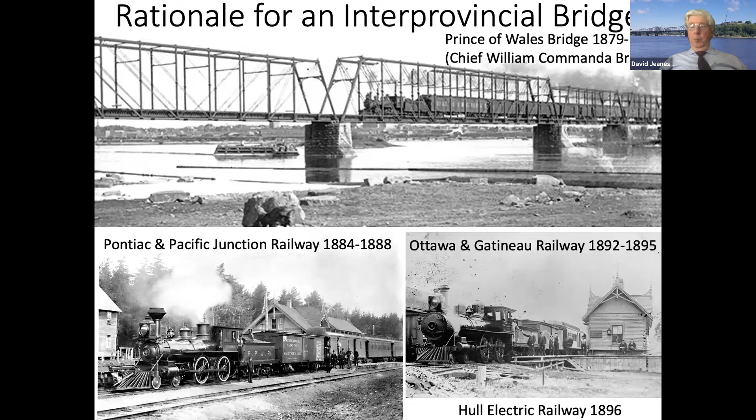He'd worked on the Welland Canal. He'd built railways all over Quebec. He was actually president of both the Pontiac and the Gatineau Railway. He'd built the city gates, the old city gates for Quebec City, and the waterworks and aqueducts for Montreal and Quebec. And finally, in 1880, he'd built the stone piers for the Prince of Wales Bridge. He also knew how to raise money.

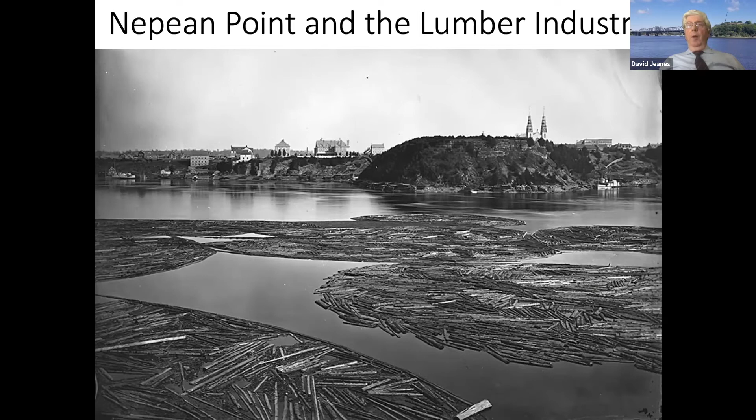So there were big problems with the river because at this point, they discovered through the test drilling that there was a mountain of sawdust 60 feet high on the river bottom. And the original plan, which would have been a conventional bridge with evenly spaced piers, was not possible because they couldn't excavate through that sawdust mountain. So they had to adopt a different bridge technique, quite novel. Its first use in the United States was in 1877, called the cantilever bridge.

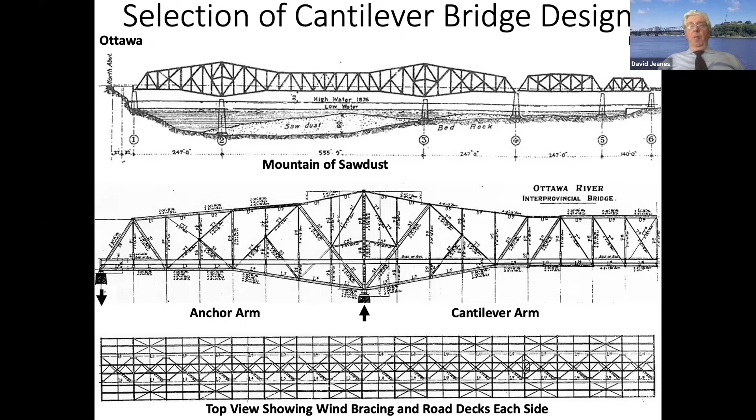Now, there were a number of cantilever bridges that had been built in Canada before, all of them shorter in span than the Alexandra Bridge was going to be. The first one was over the Niagara Gorge in 1883, and the second in Saint John, New Brunswick, near the Reversing Falls. But all of these were railway bridges. The third in Cisco, British Columbia, over the Fraser River Canyon.

The fourth, a double span bridge at Lachine, which carried the Canadian Pacific Railway over the St. Lawrence River. And there you see how the bridge could be built out over the river without support, because it's the shore spans, the anchor arms that you can't see that are just out of the picture frame, which are holding down their end of the bridge and counterbalancing the portion over the river. And then you can see there's also a pier in the middle of the river.

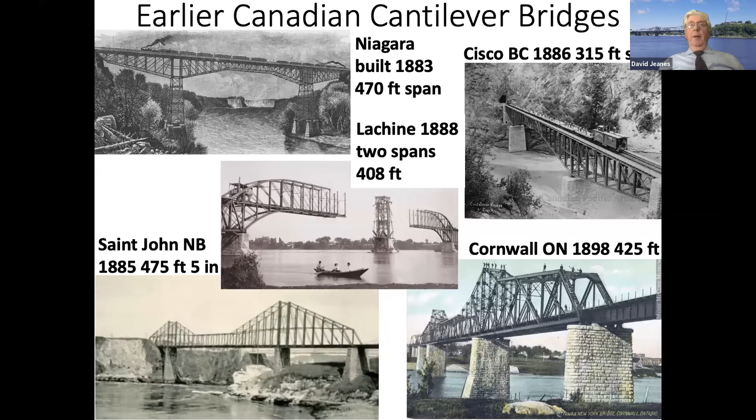There are several reasons for building this kind of bridge, either because the gorge is too deep to have scaffolding underneath, or because it's a shipping channel, such as the case with the St. Lawrence River. The last bridge of this type was actually built at the same time as the Alexandra Bridge in Cornwall for the New York Central Railway, and you see it there. Two of these bridges were actually built by Dominion Bridge, the Lachine Bridge and the Saint John, New Brunswick Bridge. So they had direct experience with building cantilever bridges.

The other 2 that I show here are the only 2 in the world that were actually longer than the Alexandra Bridge when it was completed. The Frisco Bridge in Memphis was about 50% longer than the Alexandra Bridge, and the Liberty Bridge in Budapest was actually 18 feet longer in span than the Alexandra Bridge was going to be. So the Alexandra Bridge, when it opened, was really the 4th longest cantilever span in the world.

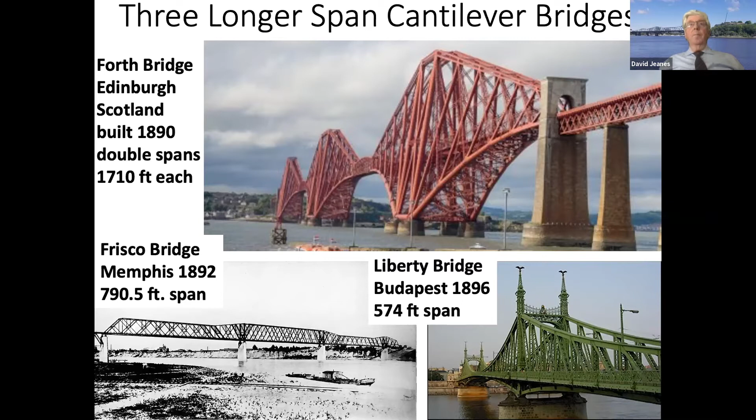The problem was when they got to pier number 2, which was nearly 90 feet high, the Canadian government put a stop to construction because there was an accident on that other bridge I showed you, the cantilever bridge at Cornwall. On one portion of that bridge, one of the bridge piers was swept away and the bridge collapsed with a multiple fatality accident. And because it wasn't clear why that had happened, particularly since the same construction technique was being used, the federal government called a halt for nearly a year to the construction of the Alexandra Bridge.

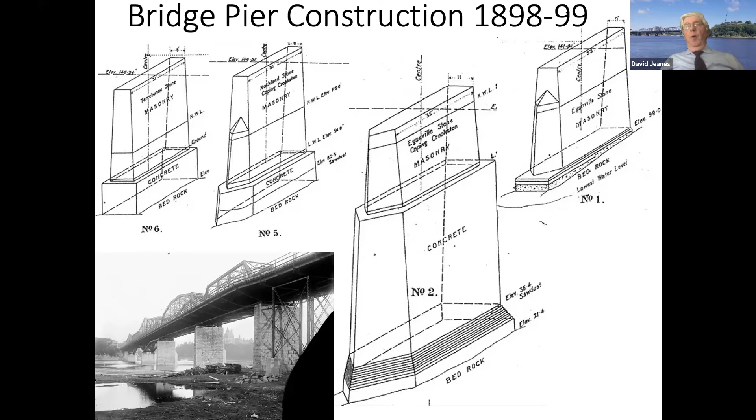In order to prove that the concrete was sound, the contractors had to diamond drill a core right down to bedrock through the concrete and extract the core, which could then be examined to determine that, yes, the concrete was in fact sound all the way to the riverbed. So in 1899, they were allowed to resume construction and finish the piers.

The next step was to build the bridge superstructure. It was all done in 1 year. Dominion Bridge got the contract in September of 1899, delivered the steel by rail from their factory in Lachine to the Hull side of the river in the latter part of 1899. And then the entire bridge was erected between January and October 1900.

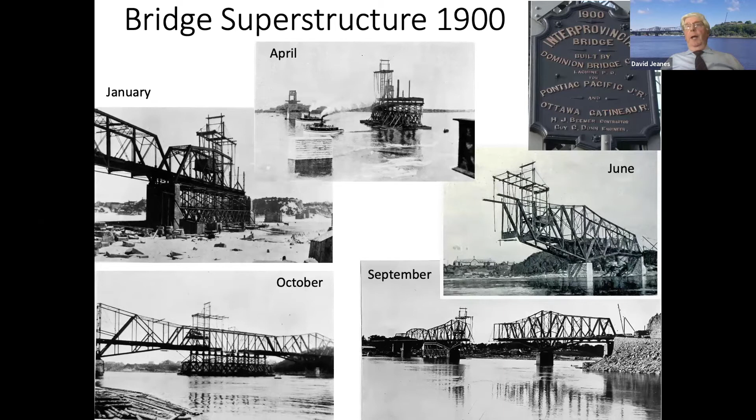Now, I'm going to just go through these pictures individually just to show you how it was done, because it was quite an engineering accomplishment. They started work in the winter and were able to complete the first 2 spans on the Hull side. You'll notice, though, that the second span that they're working on is actually supported by scaffolding that's floating on 4 steel barges or scows.

The reason they did that was that they were able to adjust the height of that scaffolding in the water by pumping water in or out of those scows. So it was floating scaffolding or floating falsework that could support the construction of the bridge above. And although it was difficult maneuvering those scows in January, they had a great deal of difficulty clearing enough of the river ice in order to get the scows into position, but they were able to build that bridge span.

Next, they built the bottom part of the anchor span of the first cantilever. They built it on the Hull side of the river, but in April of 1900, they floated it across the river to the Ottawa side with the help of 2 Ottawa-based tugs. And they're pulling those 4 steel scows with the entire scaffolding and bridge deck sitting on top.

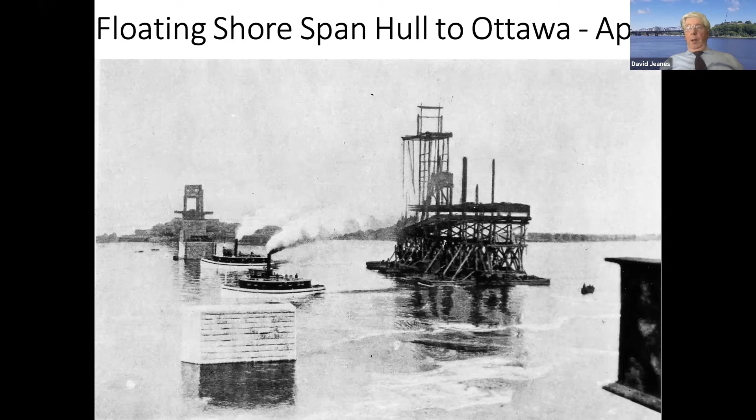And they towed it downstream, turned it around 180 degrees, pulled it back upstream between the piers, and then maneuvered it over to the Ottawa side and dropped it onto that bridge pier that you can see in the water in the foreground and attached it to the steel girder that you see sticking out of the right frame of the picture. So that was how they were able to build where the steel had been delivered by rail on the Hull side of the river, but still managed to move everything over to the Ottawa side. And then they could complete construction of the first cantilever on the Ottawa side by June.

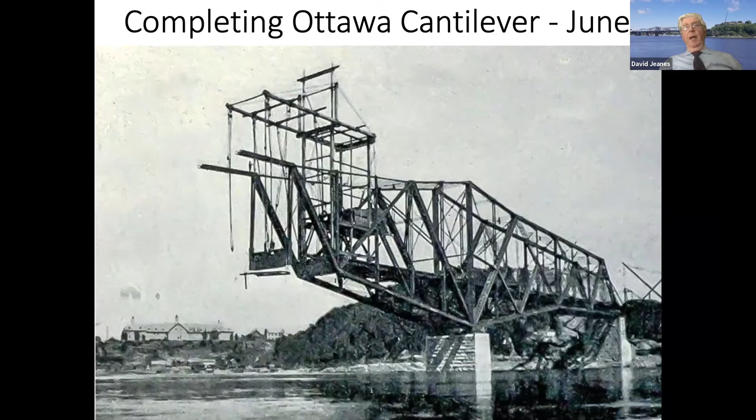You can see that the anchor span, which reaches back to the pier at Nepean Point, is complete here, and they are currently building out over the water with a traveling crane, that rather spindly looking device, which ran on rails along the bridge and was able to lift steel girders into position up to 60 feet in front of the front edge of the bridge. So that extended right to the middle of the river, and then they moved everything back to the Hull side.

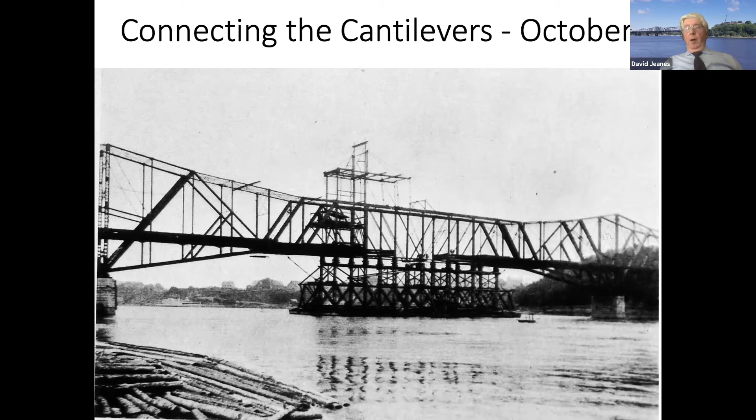You can see the scows and scaffolding floating between piers 3 and 4 on the Hull side there, and they're doing exactly the same thing. They've completed the anchor arm of the Hull cantilever, and they're now building out to the middle of the river. So by October, they were able to join the 2 together, and for that they moved the floating scows right to the middle of the river, jacked them up by pumping out the water so that they supported the 2 parts of the bridge in exact alignment, and then put in the 60 feet of extra steel just to join the 2 pieces together. And then the bridge was complete. Dominion Bridge finished their work in November of 1900.

Now, I just want to mention here, I've been referring to it as the Interprovincial Bridge. It was built by the Interprovincial Bridge Company. It was called the Interprovincial Bridge on the day that it opened. But in 1901, Mayor William Morris of Ottawa proposed that it should be renamed the Alexandra Bridge in honor of the royal visit of Queen Alexandra's son, the Duke of Cornwall and York. He was later King George V, and that it could be named at a ceremony when he and the Duchess of Cornwall and York, later Queen Mary, were in Ottawa.

Unfortunately, neither the mayor nor the Canadian government had consulted Buckingham Palace, and so naming the bridge Royal Alexandra was a violation of protocol. As a result, the Alexandra Bridge has never been the official name, but it has been the popular name ever since 1901.

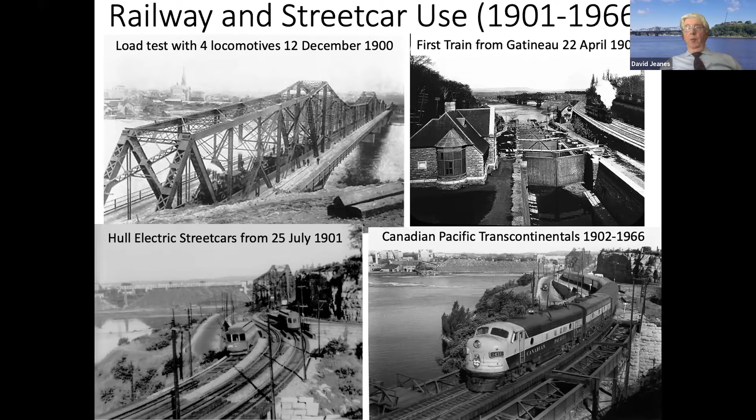Now, I want to mention also, I'm drawing to an end here, but the Quebec Cantilever Bridge is very famous because it's not only the longest cantilever span in the world at over 1,800 feet, but it's also the most infamous bridge in the world, because when it was built, due to engineering errors, it collapsed with a loss of nearly 80 lives in 1907. And there were a number of issues with the consulting engineer and the Phoenix Bridge Company, which built it. Curiously, and this is just a coincidence, the chief engineer of the Phoenix Bridge Company in charge of this project was the brother of the Charles Deans who had built the piers for the Alexandra Bridge. So, you know, it's a small world, but anyway.

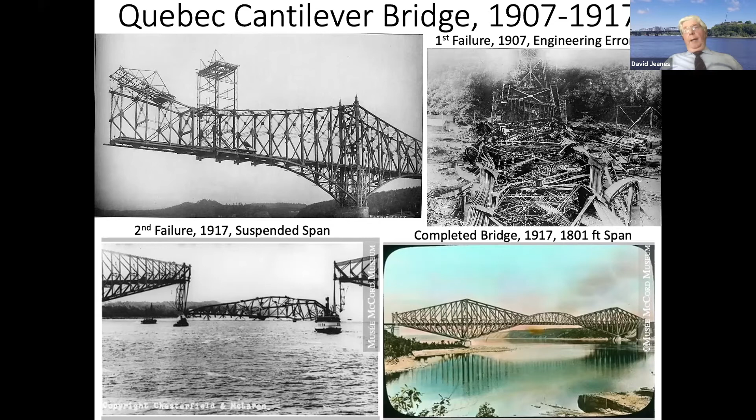The next small world aspect was that those three men that I showed you from Dominion Bridge who designed the Alexandra Bridge, George Duggan, Phelps Johnson, and Fred Shearwood, actually designed the replacement bridge at Quebec, which was completed in 1917. There's an error on this slide. In 1916, during the final lift of the suspended span to cross the middle of the river between the two cantilevers, it collapsed into the river because of a failure of a metal component. It wasn't a design error this time, and unfortunately killed more construction workers. But the bridge was still successfully completed in 1917 and has stood there, the longest single cantilever span in the world, carrying both a railway line and a road.

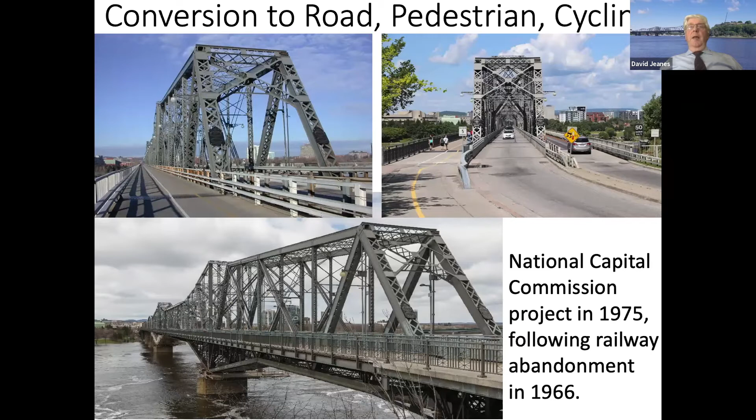Now, in 1966, as I mentioned, Union Station was closed. And in 1975, the National Capital Commission did a complete rework of the bridge to put a road deck down the middle where the railway line used to be, to keep cars operating on the downstream side of the bridge, but to convert the upstream side, as you all know, to a pedestrian pathway and a bicycle path. And that has been its role since then. There's been extensive maintenance done over the years, and I'm not going in detail into this because it's really going to be part of a later Heritage Ottawa lecture, which you'll hear about later. But the work has really been pretty much continuous since about 2009.

The bridge was completely repainted in 1995, but a major steel repair job was done dealing with a lot of corrosion between 2009 and 2011. The road deck had to be completely replaced, as was the boardwalk. An inspection walkway was constructed underneath the bridge, and there has since then been a great deal of ongoing, almost continuous repair work, safety monitoring, and inspections, and that is continuing.

Just to mention here, looking at these two pictures, a cantilever bridge of the early design is very complicated because it consists partly of steel columns, like the latticework column that you can see running diagonally on the picture on the right, and link bars with holes in the end, which are bolted or pinned together. The link bars are the parts of the bridge that are in tension. The steel girders, built-up girders or columns are in compression. And the pins that hold the whole thing together are critical to the stability and safety of the bridge.

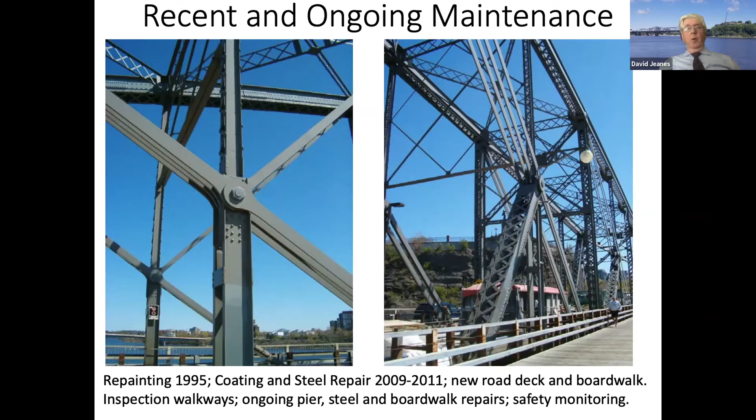When you get a failure of a cantilever bridge, it can be catastrophic. You saw the picture of the collapse of the Quebec Bridge. And there was a similar cantilever bridge collapse a few years ago in Minneapolis. So the condition of these components on the bridge is critical from a safety point of view, and they are being monitored very carefully.

You'll hear more about that later on. From a designation point of view, the bridge has no legal protection status, but it was designated in 1995 as a National Historic Civil Engineering Site. This designation was by the Canadian Society for Civil Engineering, and they placed bilingual plaques on the bridge. These were, of course, in addition to the commemorative plaque which Dominion Bridge had put up in 1900. There are 4 of these plaques, 2 in English and 2 in French, which are on the end of the bridge.

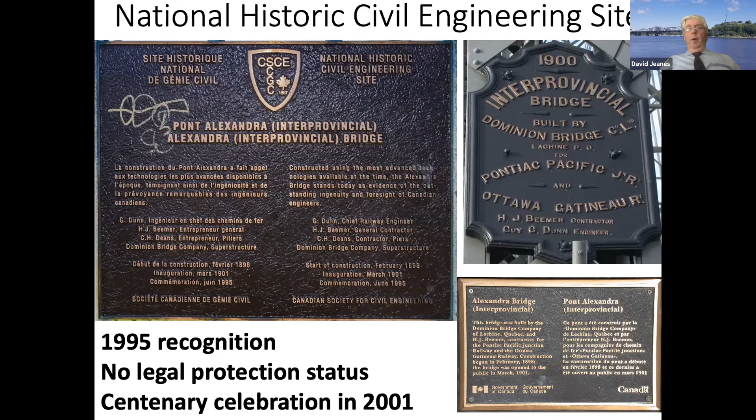And then finally, there is a government plaque which doesn't convey any degree of government protection because the bridge is actually owned and maintained by Public Services and Procurement Canada, and we'll be hearing more from them later in the year. What we're facing right now is a proposal from the government that the bridge needs to be replaced in about 10 years' time. And I'm not going to be talking about that tonight.

Again, that's the subject of a future talk, except that the consultant proposals so far have looked at either replacing it with a replica that would look something the same, a signature bridge, which would look quite different, but would be making an architectural statement of some sort, or a rather utilitarian contemporary bridge. And as you have heard, the Alexandra Bridge Coalition is opposed to all three of these options and would much rather see the bridge repaired and maintained as it is and turned into a green pedestrian and cycling facility.

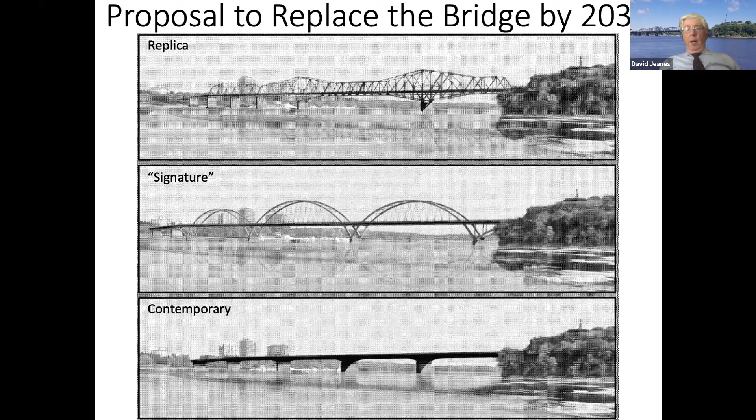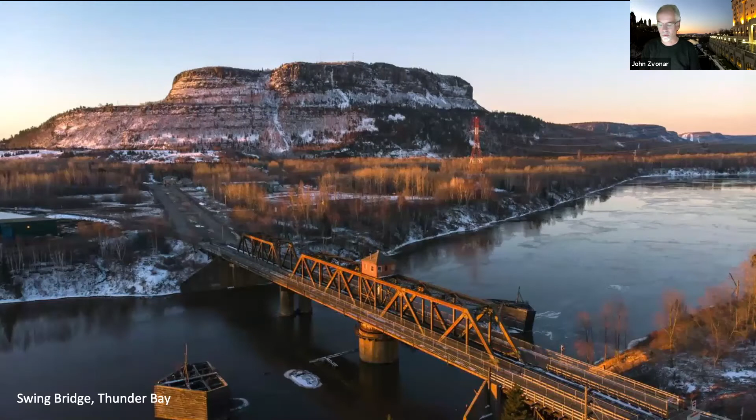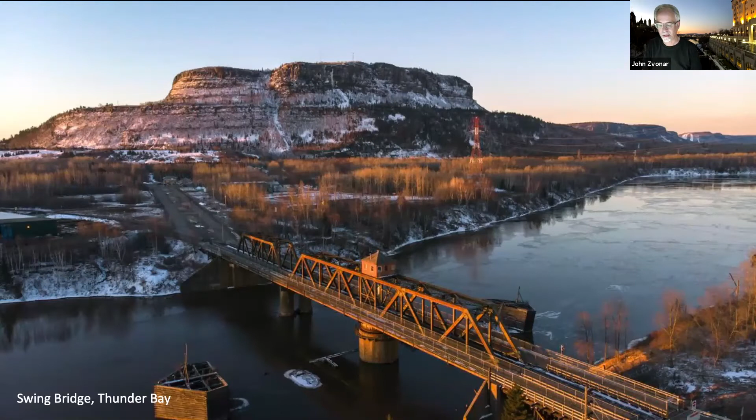Good evening. Historically and metaphorically, bridges have long served as indelible icons and have been embedded in our collective subconscious. I grew up in Thunder Bay, and my coming of age included a swing bridge over the Kaministiquia River, my connection to day camps and swims at Chippewa Park. The bridge was built in 1909 to connect the new transcontinental railway and Prairie grain shipments with the Lake Superior port. It remains front of mind as one of my earliest memories of bridges.

Since then, numerous examples spring to mind: the Tower Bridge in London, or the Forth Bridge in Scotland, or closer to home, the Brooklyn Bridge, or the Golden Gate Bridge on the West Coast. And in as much as they are appreciated, it is only when they are exposed or succumb to any number of threats that communities rally to either save them or to reconstitute them. The following section will examine a few case studies, generally from the point of view of history, threat and damage, and community response. And while there may be better examples, there certainly are more examples. The point is to illustrate the tradition of enthusiasm within communities, large and small, towards protecting their cherished engineering heritage.

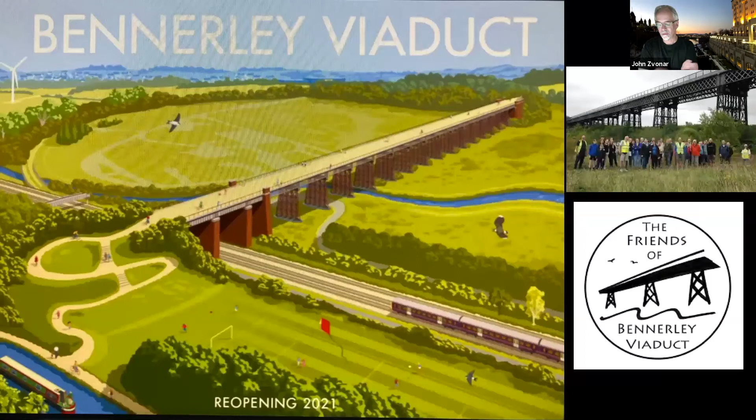While proposals for its demolition were met with local resistance, the structure stood for many decades without a function and was finally sold to a conservation group in 2001. Today, the Friends of Bennerley Viaduct have embraced a vision to reclaim the hulking structure and to open it to community use. And I took a number of screenshots from that presentation back in the summer to share tonight, including what you see on the screen.

The process enables volunteers to become actively involved in a regeneration project and to capitalize on the industrial heritage of their community. Ultimately, through an active website and good communications, the Friends are dedicated to giving the Iron Giant a new lease of life through restoring, conserving, and celebrating.

This year, the Bennerley Viaduct was reopened to the public after 50 years with the support of the Railway Heritage Trust, the Heritage Fund, Historic England, and of course the WMF, who will support the establishment by the Friends of an effective governance structure to ensure its long-term future.

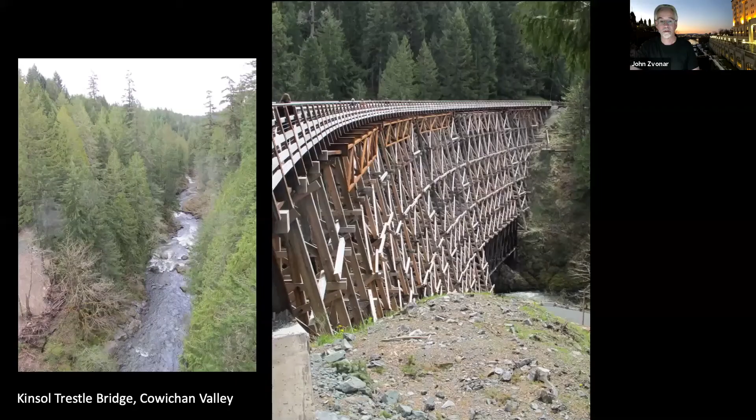Now, on this side of the Atlantic, a number of recent examples serve as suitable case studies of threatened or damaged bridges supported by a variety of communities. The Kinsol Trestle is a wooden railway bridge in the Cowichan Valley on Vancouver Island. Started in 1911 by the Canadian Northern Pacific Railway, it was taken over by Canadian National Railways in 1918 and completed in 1920. It was built so as to provide a more efficient way to transport the region's old growth timber.

The largest wooden trestle in the Commonwealth of Nations and one of the highest railway trestles in the world, it remains one of the few accessible and visible reminders of the early mining and logging industries in this area and supports tourism and recreation. The last CN train to cross the trestle was in 1979, at which point it fell into decline. In time, due to its deteriorated state, neither walkers nor cyclists were permitted to use it. Consequently, it was in danger of being torn down as it was said to pose a public risk.

Community groups then raised money to preserve the trestle for its historical and tourism value, whereas others simply wanted to repair the break in the route as quickly and as cheaply as possible to offset a lengthy detour. In June 2007, the Cowichan Valley Regional District considered a conservation strategy proposed by local building conservation specialists that would see the bridge fully restored for pedestrian use.

The feasibility study was subsequently approved, and by November of that year, a major inspection of the trestle was conducted and concluded that 80% of the major timbers were still sound and thus feasible for the restoration. Phase 2, that is a detailed plan of restoration, was delivered in November 2008 at an estimated cost of $5.7 million.

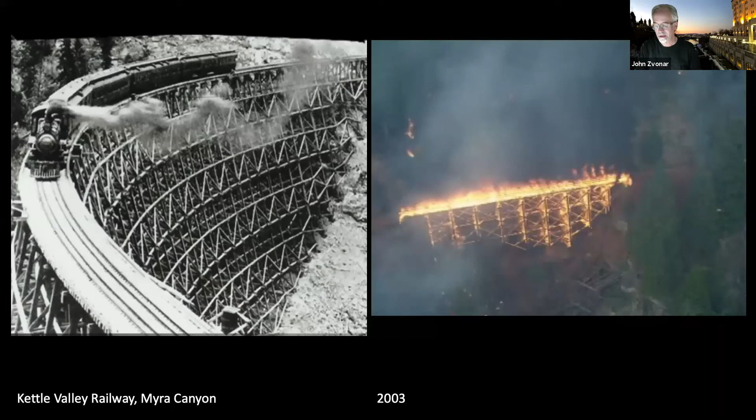The Kettle Valley Railway was built in the early 1900s in BC's Okanagan Valley. The last train ran on the tracks in 1964, at which point the railway slowly fell into decline until the early 1990s, when a campaign began to restore the structures.

In the early 1990s, volunteers with the Myra Canyon Trestle Restoration Society began restoring the 18 structures in that canyon along its 12-kilometer route. Regrettably, most of that initial restoration work was destroyed by the 2003 Okanagan Mountain Park forest fire, and 43 structural timbers were compromised, either broken by rockfalls or by falling trees.

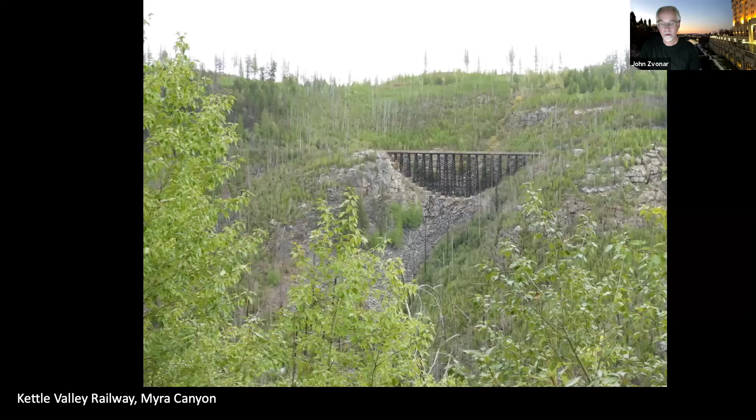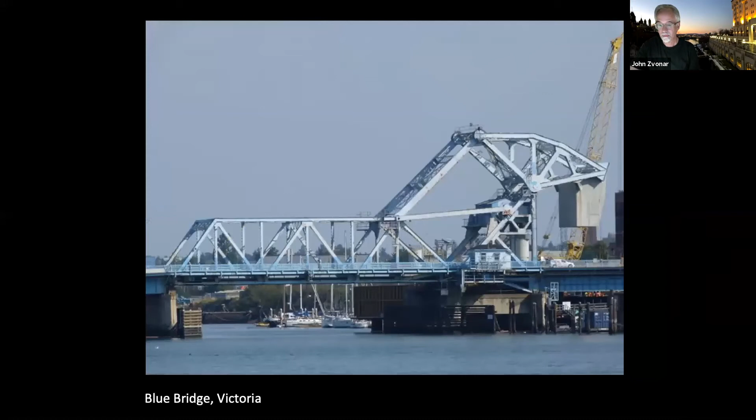While it is said that repairing Kettle Valley Railway trestles is not for the faint of heart or the impatient, there is no question that the restorative work would be done. The last of the burnt trestles was rebuilt in 2007, but it then took almost a year to coordinate the materials to replace the remaining broken Douglas fir beams. The Society still does maintenance and other works, although the trestles are now part of the Myra Bellevue Provincial Park and protected area.

Ultimately, most of the trestles were built to rigorous historical standards, that is, strong enough to carry trains, and should last another 100 years, carrying increasing numbers of pedestrians and cyclists. And again, all of them are still there.

So staying in British Columbia, the third Johnson Street or Blue Bridge in Victoria, BC, spanned the Narrows between the inner and upper harbors since 1924, serving as a vital transportation corridor to downtown. Increasing concern about the integrity of the bridge and a follow-up condition assessment led to a decision by Victoria City Council in 2009 to replace the 85-year-old bridge.

In spite of community backlash, Council confirmed its decision a year later, based on early estimates of $35 million for replacement, compared to about $30 million for a refurbished bridge that purportedly would not last as long. Construction of the new bridge alongside the Blue Bridge began in 2013, and though scheduled to open in 2015, was not actually completed until 2018.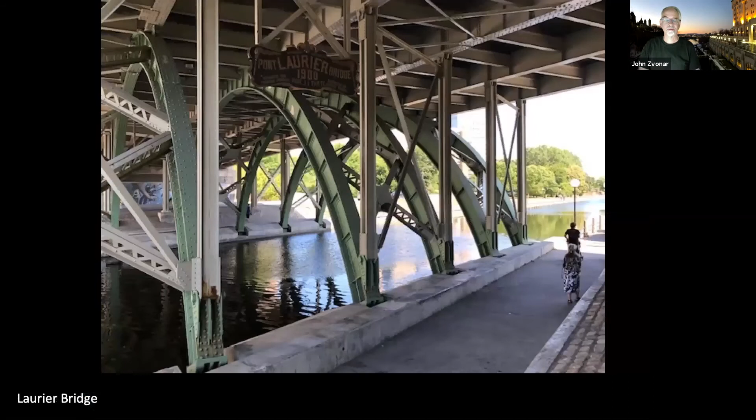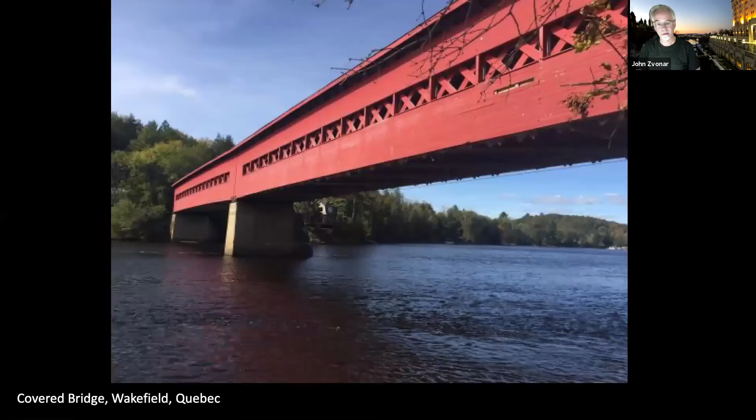This photo was taken during the walking tour that David Jeanes conducted a couple of summers ago, and noted that with the widening of the bridge to accommodate more traffic, the substructure trusses were replicated to respect the original substructure. And a little further out, the Wakefield Covered Bridge, just for a quick scan.

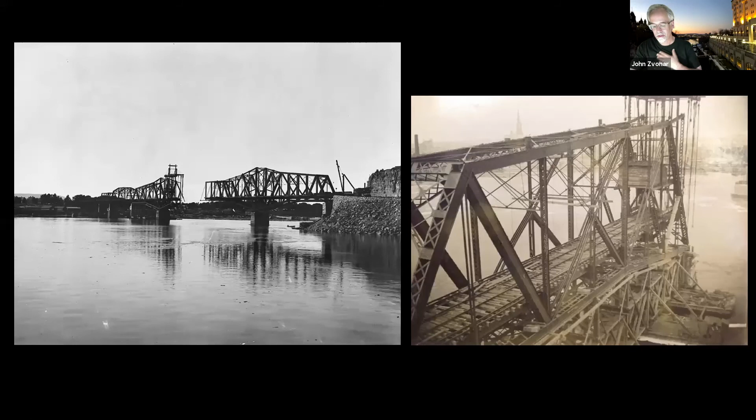But back to our engineering asset guest of honor, I've always loved that photograph of the bridge under construction at the turn of the 20th century and its use afterwards. And David's already shown you some of these pictures, including the streetcars on the left and the main locomotive on the right, with the bridge in the background connecting Nepean Point and Majors Hill Park. Of course, since the mid-1960s, thanks to the planning of Jacques Gréber and the sequestration of rail traffic away from the downtown core, the bridge was reimagined and repurposed to the vocation that we appreciate and enjoy today.

While there were many pleasant surprises through my career here in the capital, there are two which are specifically germane to the bridge. The seminal heritage values exercise that was undertaken in 2006, and as part of a suite of studies of engineering assets across the country in 2010, a follow-up whereby those values of 2006 were confirmed and accentuated. As a professional in heritage conservation, the Alexandra Bridge was the first, to my knowledge, of an engineering asset put to such scrutiny, the next step in the ongoing maturation of the discipline of heritage conservation in Canada.

And I draw a parallel with the naming of the Central Experimental Farm as a cultural landscape of national significance back in the 1990s.